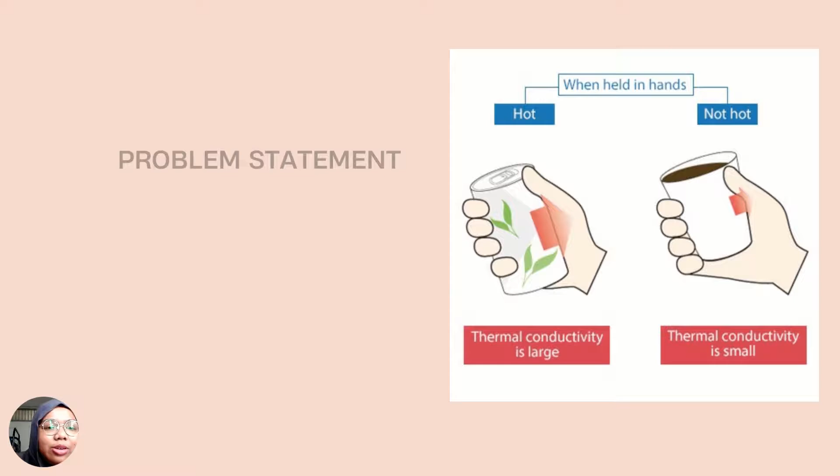Alright, let's look at the problem statement. Buildings account for nearly 40% of the global energy consumption, of which 85 to 95% is for building operations. Using building envelopes with efficient thermal performance helps to prevent heat flux with the surrounding through the envelope and conserves energy. Consequently, less operational energy is required for space cooling in summer and heating in winter.

Therefore, the application of insulation in building envelopes is considered a simple yet highly energy efficient approach that can be used in residential, commercial, and industrial sectors. The thermal performance of a building envelope is governed by the thermal properties of its constituent materials, including the heat capacity and the thermal conductivity.

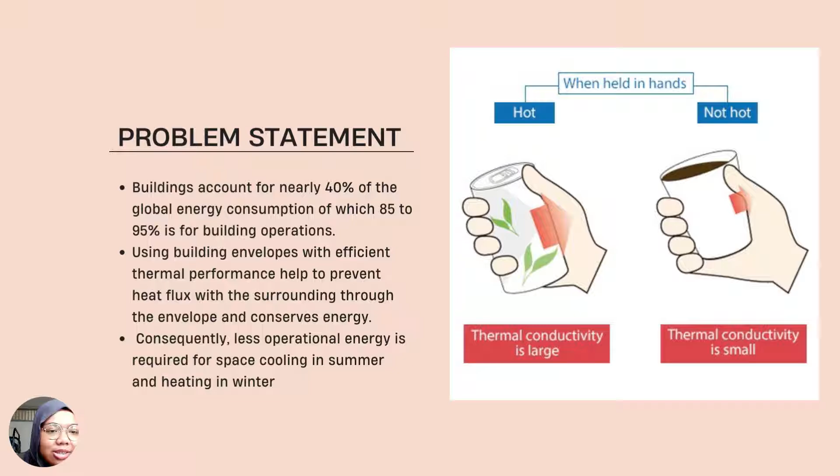Next, the objective of this study is to study the temperature dependency of thermal conductivity and specific heat capacity of commonly used insulation materials at extended mean temperatures below and above the current standard conditions. The study analysis revealed that the thermal conductivity in mineral fiber insulation increased at higher temperatures.

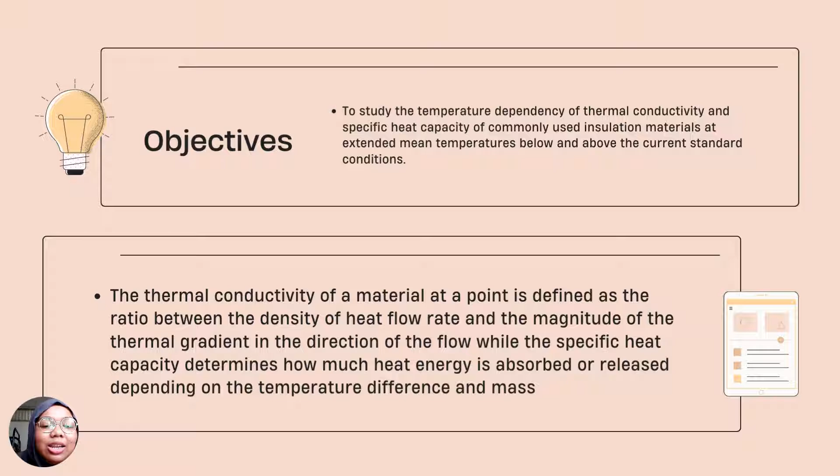Investigating the thermal performance of highly porous fibrous insulations, radiation and gas conduction are the primary components affecting the heat transfer in fibrous insulation, which both increase with temperature, whereas conduction through the solid has the lowest impact on heat transfer. Since the radiation properties vary with wavelength, the radiation component can be expected to change considerably with the increase in temperature difference. This phenomenon is one of the factors which cause the thermal conductivity in low-density materials to be more sensitive to temperature difference.

Next, for research methodology, for experimental measurement and equipment, various types of insulating materials have been selected to investigate a wide range of commercially available insulation materials for buildings in this research. Therefore, samples of expanded polystyrene insulation, or EPS, extruded polystyrene insulation, XPS, polyisocyanurate insulated sheathing board, polyiso, and mineral fiber stone wool were used.

The thermal conductivities of building products were determined using the heat flow meter. The HFM apparatus establishes a steady-state one-dimensional heat flux through a test specimen at constant but different temperatures. Thermal conductivity is determined upon achieving thermal equilibrium and uniform temperature gradient throughout the sample. The general principle of the HFM is based on Fourier's law of heat conduction, where Q is the density of heat transfer, lambda is the thermal conductivity of the material sample, and delta T is the temperature difference.

The calibration factors were calculated for each designated mean temperature using heat flux transducer outputs from both plates of the HFM. The specific heat capacity of the tested materials was measured using the LaserComp FOX600 HFM, which has an ability to measure the thermal conductivity of material.

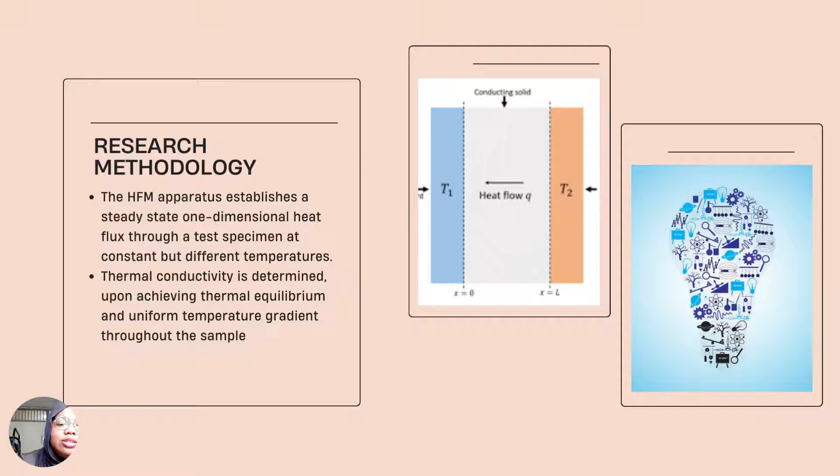It was necessary to smooth the surface of sprayed foam polyurethane and cellulose fiber samples to achieve uniform plate-to-specimen thermal contact. Therefore, rough and uneven surfaces of these insulation samples were removed while maintaining adequate thickness for the test. Thermal conductivity as a function of temperature is an empirical relationship based on experimental data.

Therefore, it is essential that a range of temperatures suitable to the material should be employed in order to determine the function lambda. In an appropriate range of temperature, it is important to test at enough mean temperatures.

Thus, in this study, the thermal conductivity of each selected sample was measured at 7 different mean temperatures, which are 5 degrees, 10 degrees, 21 degrees, 24 degrees, 35 degrees, 50 degrees, and 60 degrees Celsius, with a temperature difference of 20 degrees Celsius. For specific heat capacity, larger samples with dimensions of 600 mm times 600 mm were prepared following the same procedures as for thermal conductivity measurement.

In this study, the set points for heat capacity measurements were selected as 16 degrees, 18 degrees, 20 degrees, 22 degrees, 24 degrees, 26 degrees, 28 degrees, 30 degrees, and 36 degrees Celsius, with steps of 2 degrees Celsius and

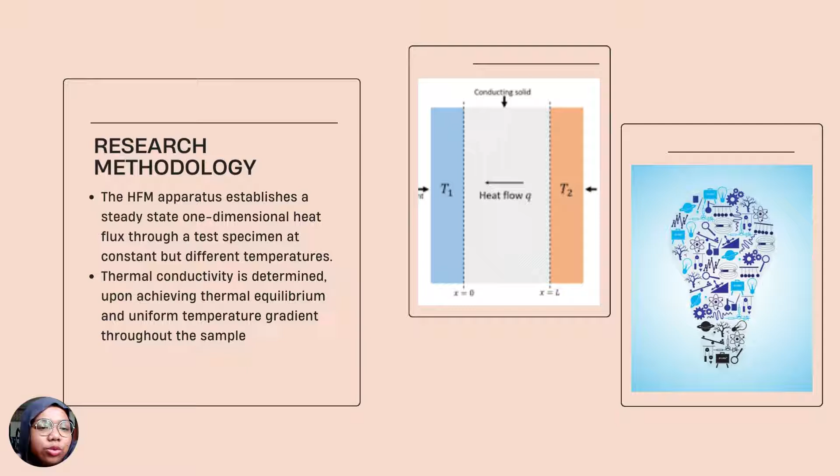6 degrees Celsius. The time for each measurement to reach the steady state of full thermal equilibrium varied depending on the size of temperature step, thermal diffusivity of the specimen, material thickness, and the amount of energy that was stored in the insulation sample. By selecting 2 degrees Celsius steps, it took 4 to 5 hours for each temperature set. Now, we will look at the results of this research.

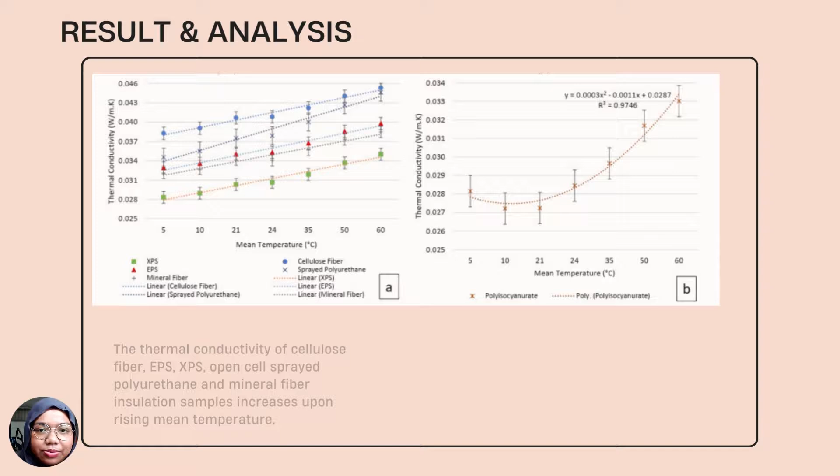The results of thermal conductivity and specific heat capacity tests of insulation materials at designated temperatures were plotted against temperature in separate graphs. Additionally, basic physical properties of tested insulations and a summary of their thermal conductivity results along with the results of the least squares regression analysis for each tested insulation material are tabulated.

The thermal conductivity of cellulose fiber, EPS, XPS, open cell sprayed polyurethane and mineral fiber insulation samples increases upon rising mean temperature. According to the results represented in the table, as the mean temperature changes from 5 degrees to 60 degrees Celsius, the thermal conductivity of open cell sprayed polyurethane foam and cellulose fiber insulation increases by 29.2% and 18.5%, showing the most and least sensitivity to the temperature changes.

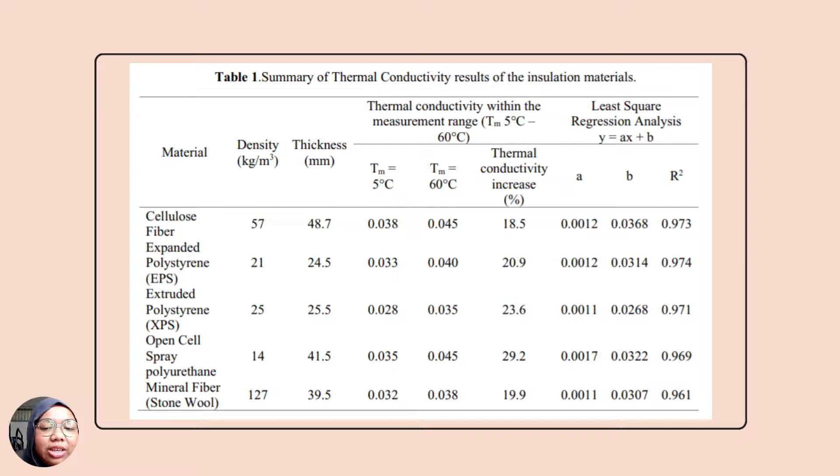With the same temperature range, the thermal conductivity of EPS, XPS, polyiso, and mineral fiber increased by 20%, 23%, 21%, and 20% respectively. These results show the degree of variation that temperature can have on insulation thermal conductivity, which cannot be disregarded. Except for polyiso, the curve fitting of the measurement points yielded a linear regression model with correlation coefficients, R squared values, between 0.96 and 0.98.

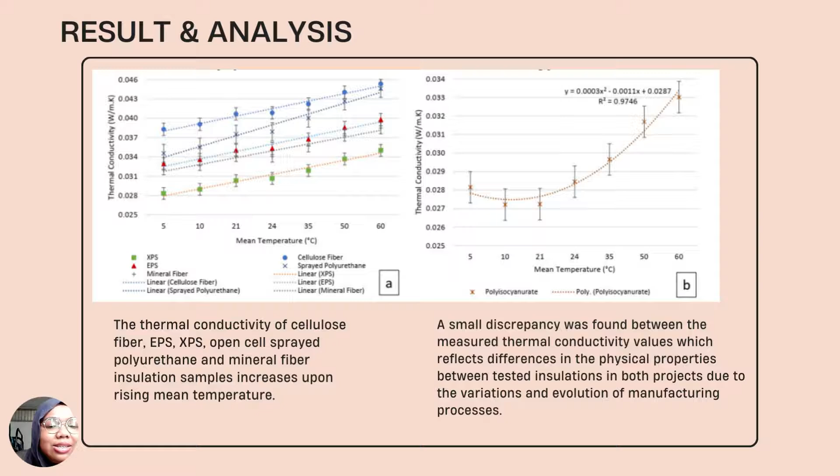However, unlike the other insulation materials, the thermal conductivity test for polyiso insulation board at different mean temperatures showed a non-linear trend with rising temperature. The thermal conductivity in all 4 polyiso samples reached its lowest point at 21 degrees Celsius, while it increased at other tested mean temperatures. This nonlinear behavior of thermal conductivity is due to the effect of the blowing agent inside the microstructure of polyiso. At lower temperatures, it starts condensing, which causes the increase of thermal conductivity.

The measured specific heat capacity of all tested insulations presented a linear upward trend with rising temperature. Upon increasing mean temperature from 16 degrees to 36 degrees Celsius, the maximum overall rise in heat capacity was observed for cellulose fiber samples as 11%, while the minimum increase was noted to be less than 1% for EPS and XPS insulation boards.

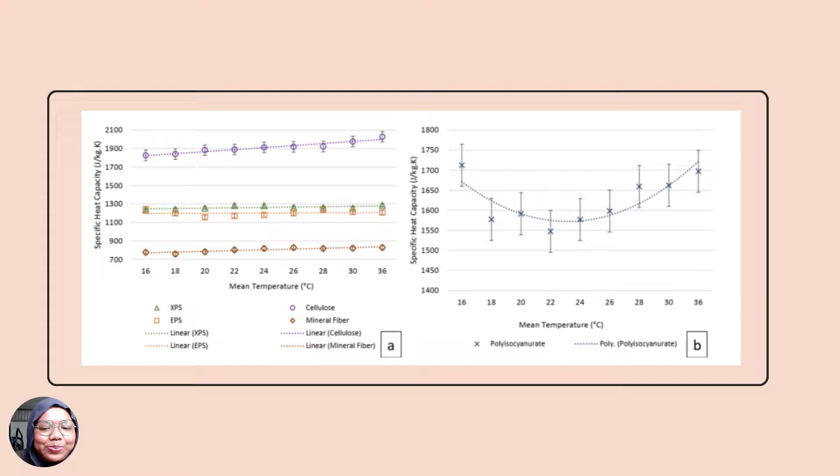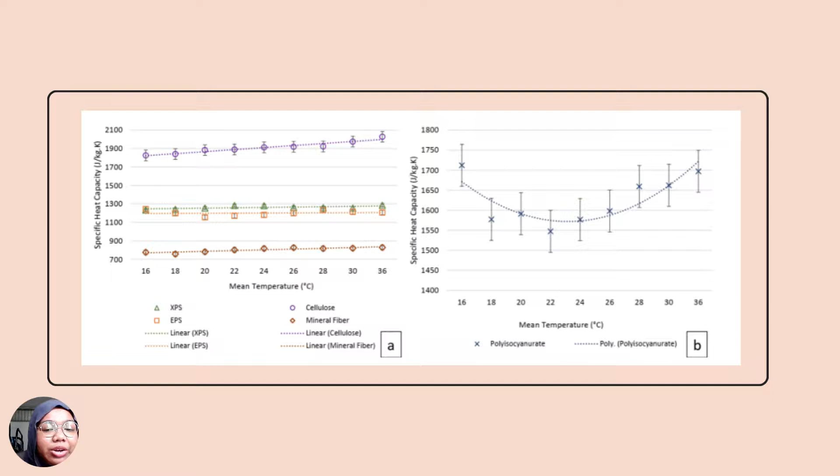However, compared to other insulation materials, cellulose fiber and mineral fiber showed more fluctuation in measured heat capacity through different mean temperatures. In contrast, the results of specific heat capacity of polyiso insulation board reflected a non-linear relationship with rising temperature.

Lastly, for the conclusion, in this study, the impact of mean temperature on thermal conductivity and heat capacity of 6 different insulation materials was investigated. Thermal conductivities and heat capacities were measured at different operating temperatures using a heat flow meter apparatus.

Analyzing the results showed that, except for polyiso insulation board, the thermal conductivities and specific heat capacities of all other cases increased linearly with rising temperature, where the curve fitting of their thermal conductivity measurement points yielded a linear regression model with correlation coefficients R-squared value higher than 0.96. For polyiso, however, the curve fitting of the thermal conductivity measurements resulted in a nonlinear regression model with R-squared of 0.97.

Insulation materials are often advertised with a fixed thermal conductivity value, which is usually measured at 21 degrees Celsius to 23 degrees Celsius. Therefore, using a constant value for conductivity of insulating material overestimates or underestimates heat flux in building envelopes through different seasons exposing different climatic conditions. Considering linear thermal conductivity for insulations allows more realistic heat flow calculation through the building envelope, since their conductivity in most cases increases and decreases at higher and lower temperatures.

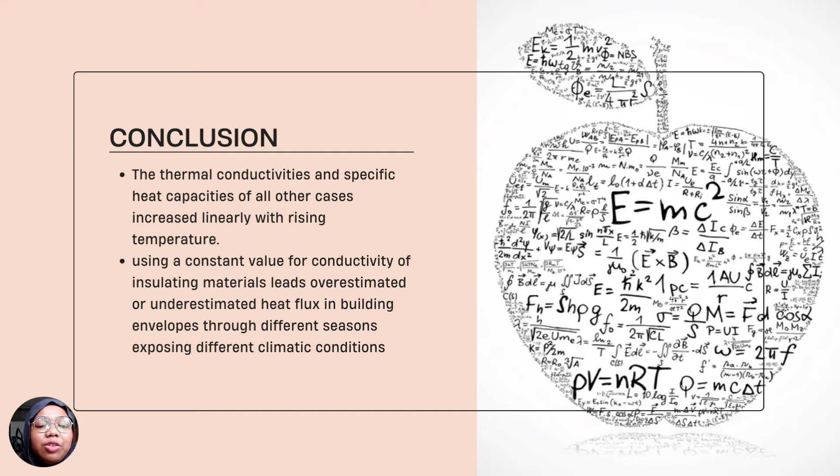The author believes that more experimental research is required to determine the thermal conductivity of different insulations with various moisture contents at more extreme temperatures.